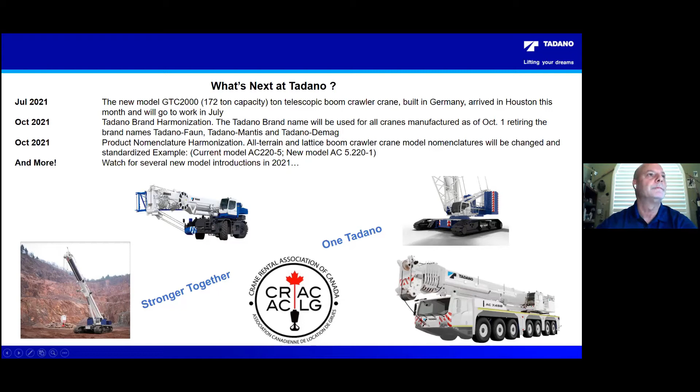Thank you, Ken, for those warm and heartfelt comments. I am a New York Ranger fan. It has been a little bit of an unfortunate year, but an Original Six fan on hockey nonetheless. I have coached hockey. I also have a son that is going to be going into travel hockey, so in for a little bit of a world of fun, and some pain as well. But today we're not going to be talking about hockey. We're going to transition over to cranes. And we're going to talk today about how we're going to take customer support to the next level on the Tadano side. So without further ado, I'm going to get started off.

Tadano maintains its laser focus on safety, quality, and efficiency to resolve issues to keep our customers running. Our mission statement is to offer our customers a great experience with ease, maximize crane uptime, and instill confidence in our brand.

On the objective side, we want to add value to our customers after the sale of our products through our service technicians and our call center. From a systems perspective, we're streamlining our processes and leveraging KPIs to further enhance our customers' experience for stock levels and fill rates.

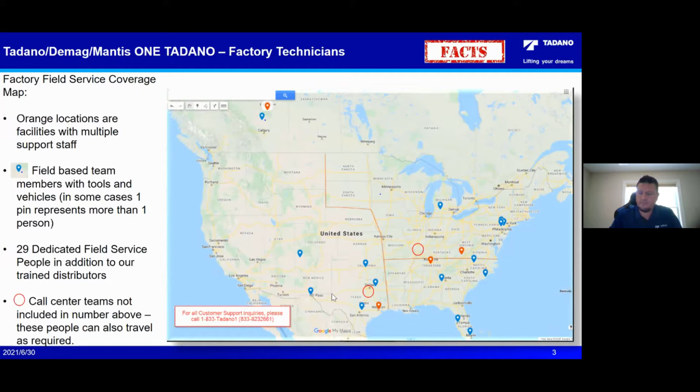Next is our Tadano facility located in Leduc, Alberta. This is a full-time service and support facility. It has a parts department to support all Tadano products and needs, and we also have distributor and customer technician training courses held there.

Now we're going to transition over to our customer call center. As of June 2020, we launched our new customer call center. It's comprised of 22 people, including our Mantis team, and we are leveraging the latest technology to accommodate the best possible customer experience, through Ring Central.

We have 10 service experts to support technical calls, 5 parts technical experts to support part identification needs, and 7 general support team members to handle general questions and inquiries.

We have launched a single North America call number for all inquiries. That is the 1-833-TADANO-1 number. If there is one thing you take from my presentation today, it is that number, which allows our end customers and distributors to have a direct line into the OEM to help troubleshoot effectively out in the field.

That call number is available 365 days, 24/7, including after-hours support. It was launched in September 2020 to provide a 100% answer rate and allow access to all areas of our customer support business the way we configured our phone system.

Next, we're going to discuss warranty and some quick facts. We believe when you have quality products, it's easy to demonstrate that with our actions. Our current target is to process every warranty claim within 24 hours of submission and turn those around.

We've launched a standard warranty statement for our Tadano and Demag products, effective March 2020. We've also increased travel reimbursement to up to 12 hours — 6 hours there, 6 hours back — for more remote areas, allowing our distributors to perform those campaigns for customers.

We have a new warranty manual combining our businesses, effective March 1st. We combined our online warranty system for all products, launched as of April 2020. And we incorporated Tadano Mantis under that umbrella for the One Tadano branding in October 2020.

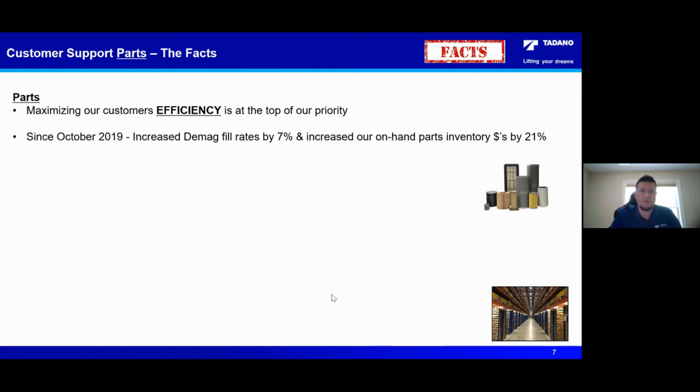Lastly, we're going to discuss parts. Maximizing our customers' efficiency is our top priority. Since October 2019, we've increased our Demag fill rates by 7% and our on-hand parts inventory dollars by 21%. As of December 2019, we increased our Tadano fill rates by 5%.

Parts cutoff times have been extended for same-day shipments to 4:30 Central. In some cases, this can mean an additional day of uptime for our customers.

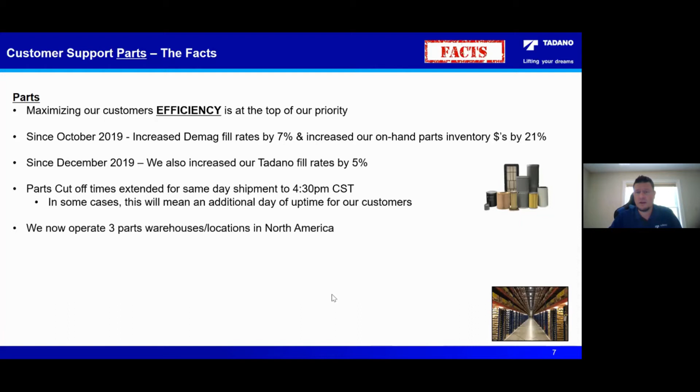We now operate 3 warehouse locations in North America. We have 2 in Houston, including our new Demag facility dedicated for parts, and 1 in Leduc. Before the end of Q1 2022, our Mantis products will follow the same process and procedures, putting parts into that warehouse.

With that said, I'd next like to introduce Justin Andrews. Justin has a love of motorsports. He resides in British Columbia. His love for motorsports is so much so that it usually involves concussions and rehabbing ailments in his body. He is an Australian living in Canada. And with that, I will give you Justin.

Thanks, Dan. That tree came out of nowhere, I didn't see it coming. I did hit it pretty hard and woke up 5 minutes later, but I was fine.

Good morning, good afternoon, and bonjour to everyone listening. I really appreciate your time, and I hope you enjoyed this presentation. My name is Justin Andrews, and yes, I am basically full Australian, but I moved over here in 2016. I've been working for Tadano now for 10 years, and in 2016 I came over to support and promote the Tadano product to the Western Canadian and Western US market.

Through this presentation, I want to touch on 4 points: the current Tadano crane lineup, what we can offer Canadian customers; the next generation, since in 2020 the rough terrain cranes went through a revamp and redesign that I want to dive into more; the challenges we face in our industry and what we're doing as a manufacturer to help ease those challenges; and the customizable options available when you purchase a Tadano product.

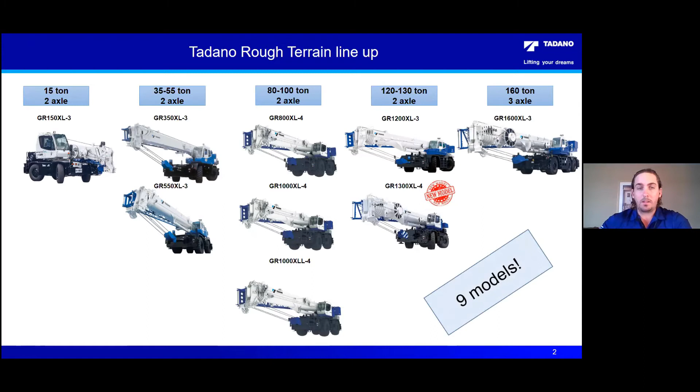So this is just touching on the lineup. Starting with the rough terrain cranes, this is our current offering. We have 9 models to choose from, everything from a 2-axle 15-ton with a 78-foot boom, all the way up to a 160-ton with a 200-foot boom, the GR1600. These products are all 100% made in Japan, and with Japanese products, a lot of the local manufacturers of the winches and other components are very close to the factories in Japan, and this is what we fit to our machines. All these products are 100% Japanese made.

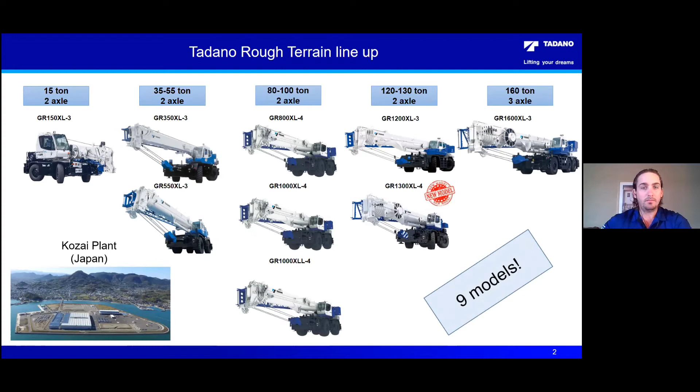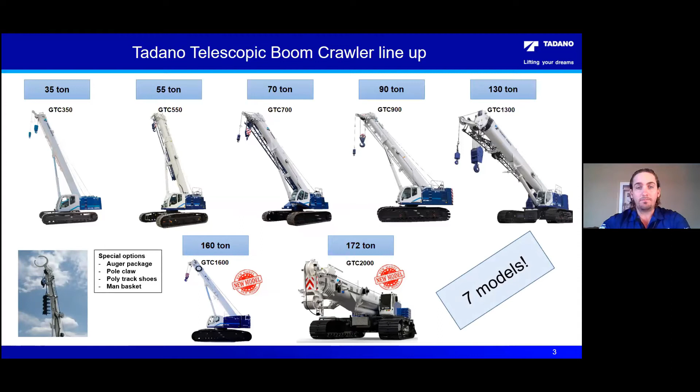The all-terrain lineup has grown quite substantially since the purchase of Demag in 2019. We're offering 21 models into the North American market at this moment. This has been very exciting. Our all-terrains are very close to my heart, I really love playing with them. So the models here, everything from the 3-axle class all the way up to the 8 to 9 axle class.

We basically should have any machine in any type of configuration, boom length, capacity that you have for a certain job. And I love to dive into these, I love really to talk about even specific cranes. As an example, the AC220 to the ATF220, 2 similar number of cranes, but 2 very differently built cranes. So, you know, I like to have these conversations with our customers.

Just to give you an insight, in the next 5 years, we're looking at bringing 15 new crane models into this all-terrain lineup, and that's really exciting for me. So please watch this space.

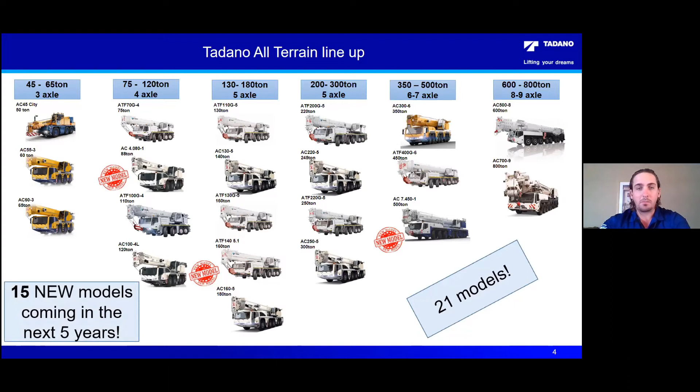Lattice boom crawler crane line. This is coming out of our Zweibrücken factory, and obviously, as we all know, this is a Demag product. 6 models to choose from, everything from a 440 ton and all the way up to our 3,520 ton, the CC8800 twin. And I'm really dying to see that crane one day, but it's a really exciting lineup.

And for me, it's a big learning curve, and I'm really excited to learn about this product. A lot of these cranes are specifically designed for certain jobs, such as the CC3800, which is our dedicated wind machine. So if you are in the wind industry, just jump online, have a look at our brochure and check out the specs of that crane. It's very impressive. Little did you know, 1965 was the first Demag lattice boom crawler crane with a 45 ton TC120. So there's a long history of manufacturing cranes.

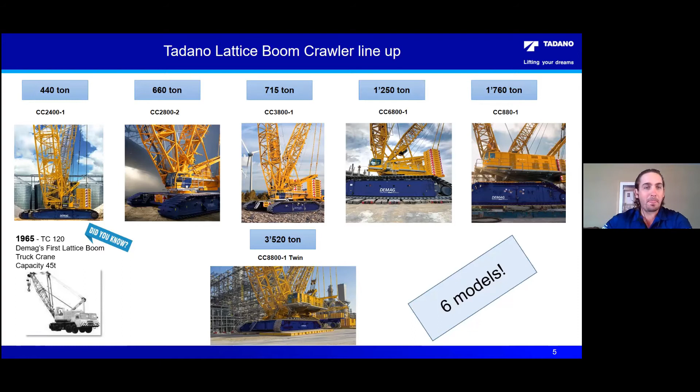Now moving into the rough terrain, I want to touch on the previous generation versus the new generation. As you can see here, a very common crane, the GR1000 XL, very popular in the Canadian market. Moving forward, and just released in 2020 at ConExpo, was the GR1000 XL and the GR1000 XLL long boom version.

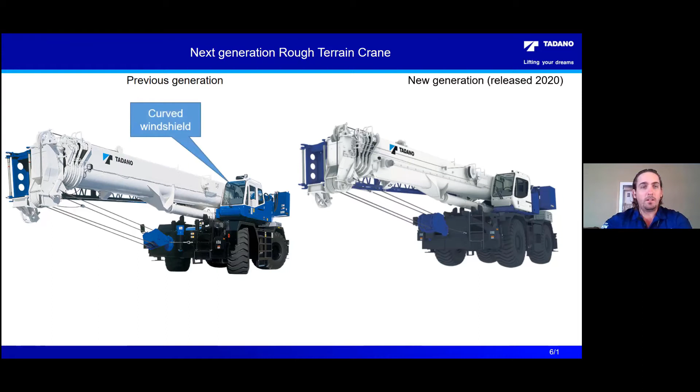I just want to touch on some really small points, which a lot of you would be very familiar with. These are the changes we've done. In the previous generation, we actually had a curved windshield on the front of the cab. We've changed it now to a flat windshield with a longer wiper blade, again for better visibility, and also probably cheaper parts if you ever had to break the windshield, and easier to replace.

Fixed counterweight position in one position, which is standard for a rough terrain crane. On the new models, we actually have a 2-position counterweight. So basically the counterweight can position 2 feet behind, which actually provides you a better chart and better lifting capacity at radius. And also there's no moving parts in this, the actual cylinders are sitting on the counterweight, so there's no swing arms or anything. You just put it in a different position and lift the cylinder back into place.

One of the comments I always received from customers was about the ladder access. It was a beautiful crane, but access was a little bit tricky. In Tadano in Japan, we did hear this. So now, and I'll explain in more detail later, we actually have a 3-position ladder system and also relocation of the ladder for better access and egress.

In the previous generation, we did not have a rear view camera or any safety cameras around the machine. Now we have rear, side, and front view cameras, plus also a backup sonar camera, and this is all standard. These are just minor changes, but there's a lot more out there.

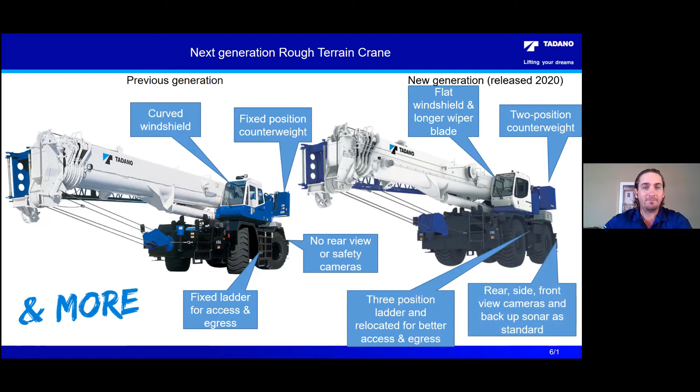For the guys that have been in the crane, they're used to the cab and used to seeing inside. This shows the changes - left side is the previous cab. We're going to a very similar size cabin, but we've changed the ergonomics where the dash is a little bit lower, so you have more visibility. The AML screen is quite a bit bigger, and it's now a touch screen, which has been tested down to -40°C and has a backup. So if there was a failure with the screen, we do have a backup to it.

The mechanics are still mechanical linkage to a pilot valve. That did not change in this new generation. Also, the 100-ton class now has a tiltable cabin up to 20 degrees.

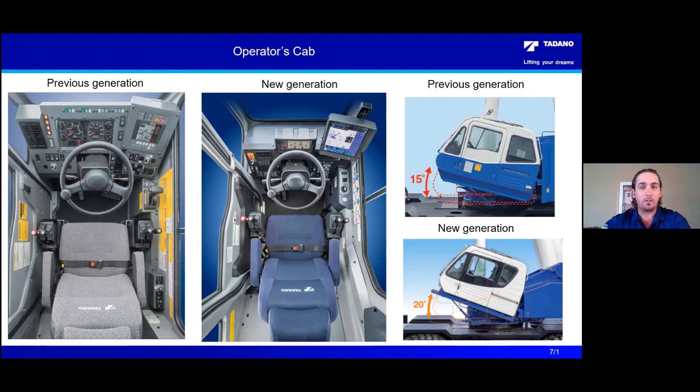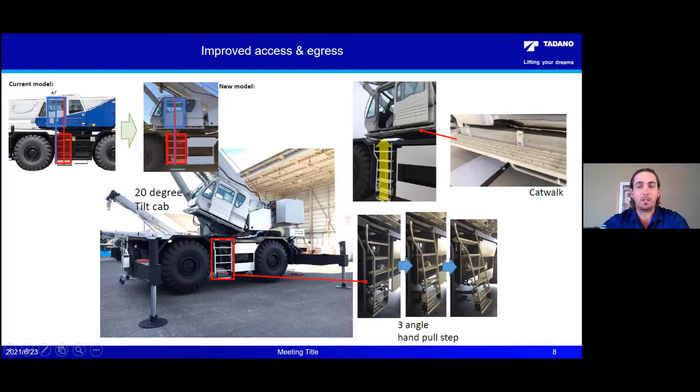As for the access and egress, this is what I was trying to explain earlier, and this is what our engineers in Japan came up with. We've actually relocated the cab slightly, and also the ladder sits directly under the cab, if you can see on the top left picture. So the access and egress is much, much nicer. Also, the ladder in the bottom right picture can come out almost like a set of stairs now, to make it easier and more comfortable for any operator.

The cameras are now all around the crane, plus also on the winches, and also the backup sonar. This is something we have standard on all next generation GR 800, 1000 XL, and 1000 XLL cranes.

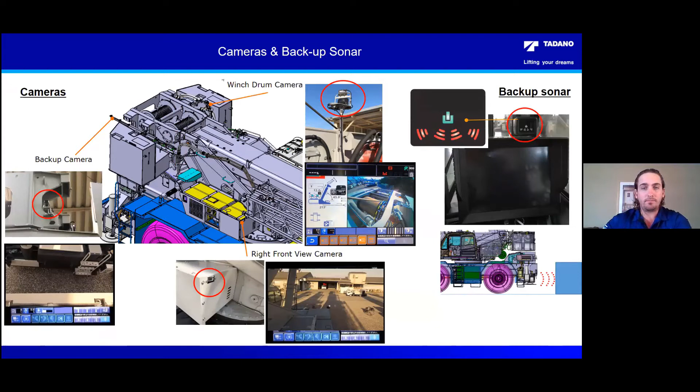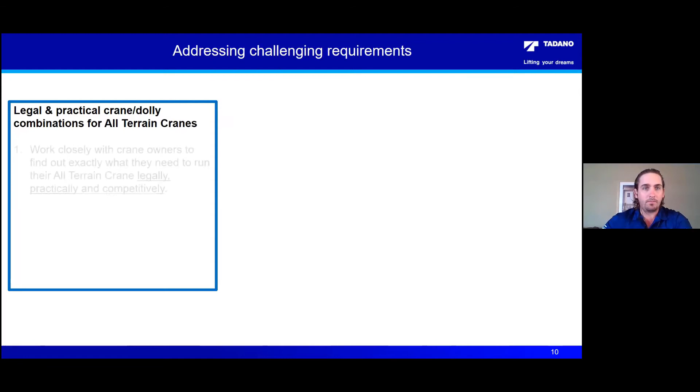Moving into the all-terrains - I really dive into this because I found it's a very big challenge in the Western Canadian market, the crane and dolly requirements are very, very strict. So what I do is work closely with the crane owners to find out exactly how they want to run. I want to run in 3 ways: legally, practically, and competitively. That's how I try and help out my customers.

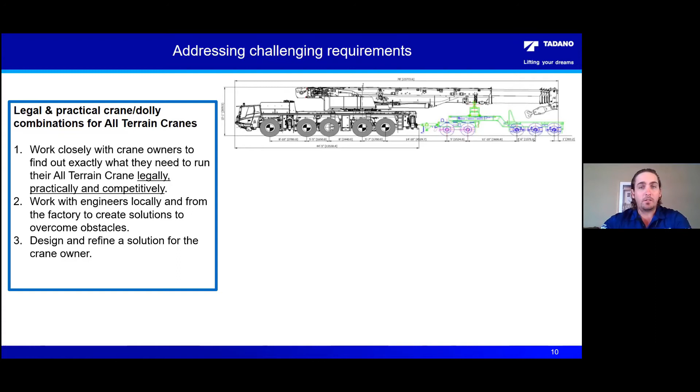So I've worked with local engineers based in our factory, and also local engineers at dolly manufacturers, to try and overcome the obstacles. That ends up coming out with the design, and then we do what we call design and refine to get the solution for the customer, which brings out the final product - which from my experience has worked out very, very well. But at the end of the day, we always want to be safe and legal. That is my goal.

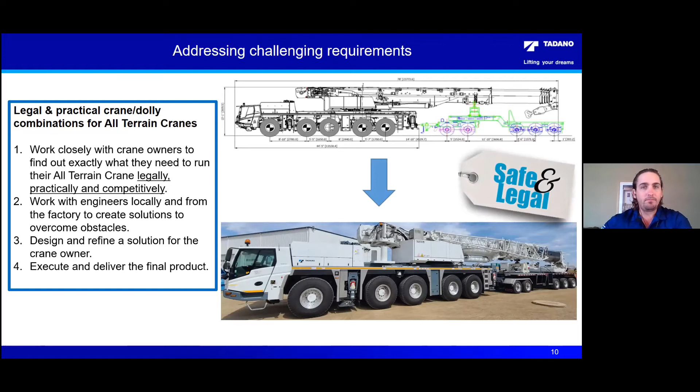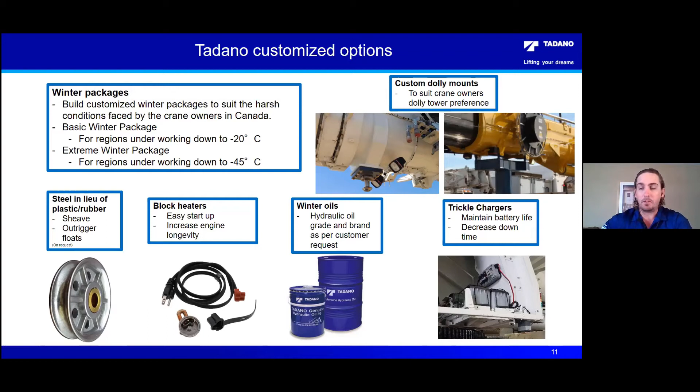Thank you, Justin. I appreciate that. Good afternoon, everybody, and thanks for taking the time to join us here today to talk through the Tadano and Demag brands and what we've got coming in the future. My name is Lance Rybum, and I am the Regional Business Manager for the Eastern Province in Canada, from Manitoba to Atlantic Canada. I'm also responsible for the Northeastern states in the US - New York State, New Jersey, all the way up and through New England.

Just a little bit about myself - I too am a hockey fan, been following the Penguins pretty much my whole life. This year didn't work out for us as well, but we've had some recent success, so no complaints here on that side. And for you Canadian fans, good luck to Montreal in the finals, hopefully they make it and they're good to go.

But moving on, I'm just going to talk about some of the all-terrain aspects and features that we've got in our cranes.

So I'll touch on the all-terrain lineup, go into a little bit more detail, and show you the differences between the ATF and the AC and how they complement each other as the acquisition was made. I'll talk a little bit about the IC1 Plus, some of the features and benefits, and also the troubleshooting aspects.

Dan touched on this in his presentation as far as our 1833 Tadano number and the accessibility for customer support in North America, and I'll just show you how to incorporate the AMLF and the IC1 Plus in aiding those guys and helping you maintain your uptime and keep your cranes running.

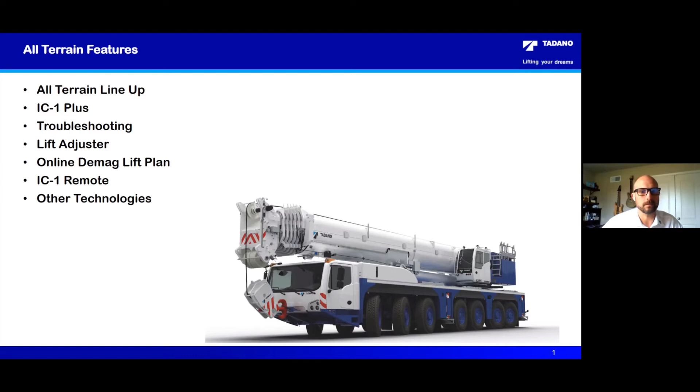So first off, I know Justin discussed the product lineups and what we offer at a high level, like a 30,000 foot level. So if I come down into like the 15,000 foot level, I'll just show you where everything lines up and where it matches up between the models.

I do get questioned a lot, and I'm sure Justin and the other RBMs and Dan and Ken can attest to this as well. We get asked, what are we keeping? What's going away? What are we going to do with our models, and how is that all going to integrate? As you can see looking at the lineup, we do have a lot of models now, but they really complement each other. That's one of the things I want you to take away from this - the integration of the Demag products with the all-terrain product family.

Because of the technologies and philosophy that Demag used versus the technologies and philosophies that Tadano Faun has used in the past, they really mesh into a solid portfolio and give you, the crane owners, the opportunity to really customize the fleet to your liking and what your needs are.

Going down through the lineups, you'll see with the Demags particularly, they focus more on long boom single engine concepts. So you're gaining that weight benefit and taking advantage of that by adding an extra boom section, allowing you to get more main boom length and save on the weight so you can get the permits for those size class machines.

Conversely, the Tadano machines have traditionally stayed with 2-engine machines and shorter boom, more known for their heavy pick main boom capacities versus their jib capacities. Like I said, you can see it really lines up well. We do have one or two spots where we have multiple machines in the same class with very similar specifications, but for the most part, the two lineups really complement each other, give us a full offering, and allow you, the crane operator, to really customize and pick and choose what fits your needs best.

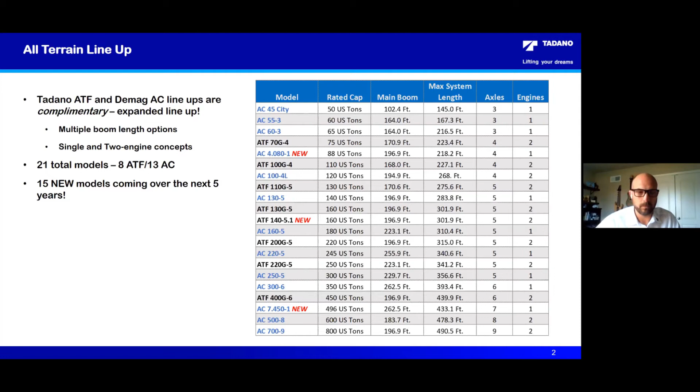Moving on, talk a little bit about the IC1 Plus. The IC1 Plus control system is the system that we will be continuing with into the future. With the new models that we've had recently introduced on the ATF side, those models are going to continue through their natural lifespan, and as they get replaced, that's when you'll start to see the IC1 Plus get incorporated into the newer models.

So IC1 Plus, some of the features include live determination of the crane's capabilities, depending on the slew angle of the superstructure, counterweight, and outrigger position. It really allows you to take advantage of what the crane does and what it offers. It includes automatic counterweight detection, so as soon as you pick up the stack, it's going to know what's on the back of the crane. It allows you to just confirm that in the IC1, and then you're good to go.

But it does and should know what you're picking up. The asymmetrical outrigger settings with the IC1 Plus aspect allow you multiple length setups, so it'll incorporate that into maximizing your capacities.

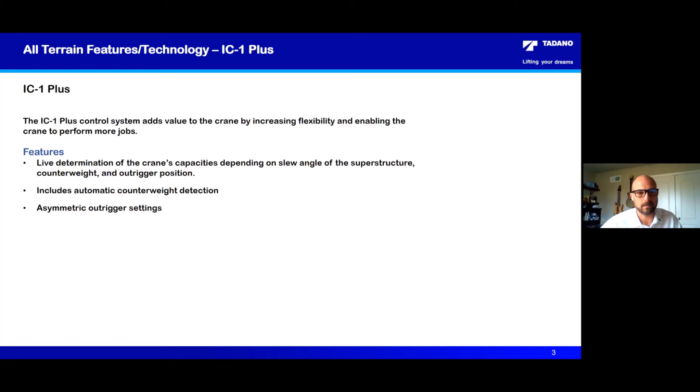Some of the benefits of this: it improves the versatility of your fleet. Paired with the onboard determination of the capacities, it allows you to really work in confined spaces and maximize what your capacities are, as we talked.

It reduces transport costs. So if you've got a situation where you may not be able to fully utilize the outriggers at 100%, but you can in one spot, you'll be able to maximize what your capacities are over that outrigger beam, and possibly beat and outlift what the 360 capacities would be in that particular situation.

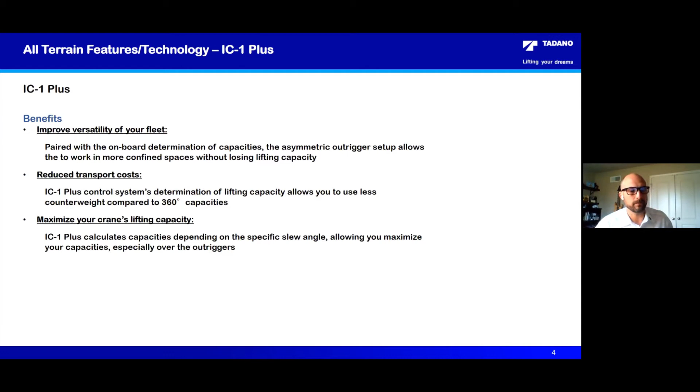And you can also just maximize the crane's lifting capacity in general. It allows you, through the slew angle, to interpolate and tell you what your max capacities will be. So it really allows you to add versatility to your fleet and gives you a lot of flexibility.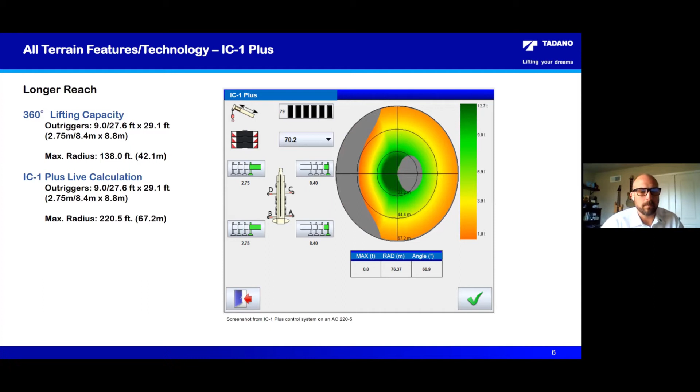Touching on the online job and lift planner, this is a graphical job planning tool. It simulates the IC1 Plus that you see in the cab. It allows you to plan for asymmetric or just straight 360 charts, depending on your setup and how you need to simulate it. It also shows in the lower right-hand corner the outrigger ground pressure.

So if you need to have critical lifts or different areas where the outrigger ground pressures are important, you'll be able to go in and simulate that before going out to the job, so you know what limitations you have. The website's listed below. You can also reach it at demagmobilecranes.com — there's a link on that page as well.

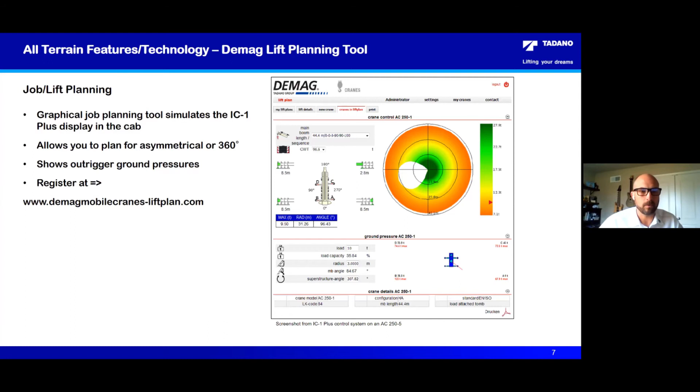Another benefit or feature of the IC1 Plus is capacity radar. This is basically a plus or minus 30-degree working area that you can see, and the little black dot represents where your load is located within the chart. Obviously, your green, yellow, and red simulate your limitations within your RCL or your IC1.

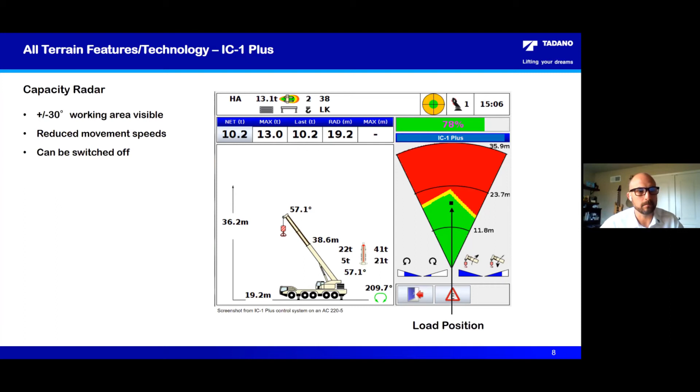Moving on to troubleshooting. One of the benefits — and this is available, I don't have a screenshot of the IC1 Plus, so I apologize for that, but it's very similar to what you see on the AMLF. This is a screenshot out of the newer AMLF control system in the Tadano Faun ATFs. As you can see, it's very simple to access what the error codes are within your crane.

All you do is click this little red button up here, and it'll pop up this little screen on the right-hand side. Everything is pretty plain — it tells you what the error code is and describes what the code should be. Paired with calling into the 1-833-TADANO-1 number, you can talk through with the Tadano tech, and they can actually help you troubleshoot and get the crane up and running.

We're looking at 85% of the time where we're able to at least get your crane running. It may not be completely fixed and repaired, but you can get the jobs done, and you can get it back to your shop to finish and do the full repair if required. But great feature.

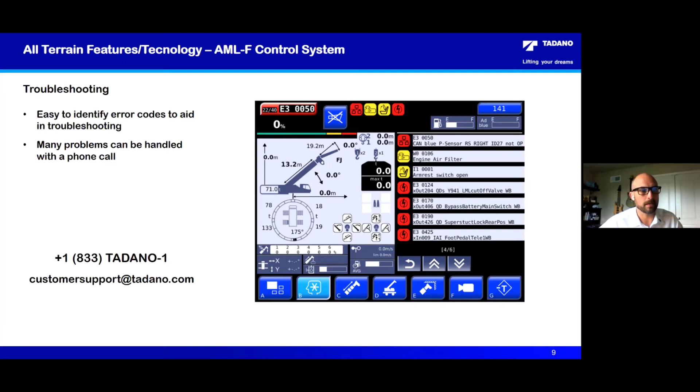It allows your operators to really know what's going on with the crane and hopefully help you troubleshoot and maximize your uptime. Another cool feature on the ATFs is called Lift Adjuster.

What this does is it allows you to account for any boom deflection that you would have as you're picking a load. Most operators are very familiar with this and are able to do it, but this takes the guesswork out and really allows the operator to sit back and have some level of comfort that he's not going to have to worry about his load swinging or anything getting damaged.

So if you have an MRI or something really heavy that's inside and it's a blind lift, simply click the button in the lower right-hand corner, it revs up the RPMs on the engine, you pull back on the hoist control lever, and it goes through a set of lifting, running the hoist up and booming up to account for any boom deflection you may have. As soon as the LMI realizes that there's no more capacity or weight being added to the load, it automatically shuts off and the operator's back in full control of the crane.

So again, just a safety feature. It might work a little bit slower than some operators say - that's one of the complaints I've heard, that it's slow, but it's intended to be slow. Speed is the enemy in a lot of these critical lifts, so you want to take your time and make sure the crane's working properly. This is what it allows it to do automatically.

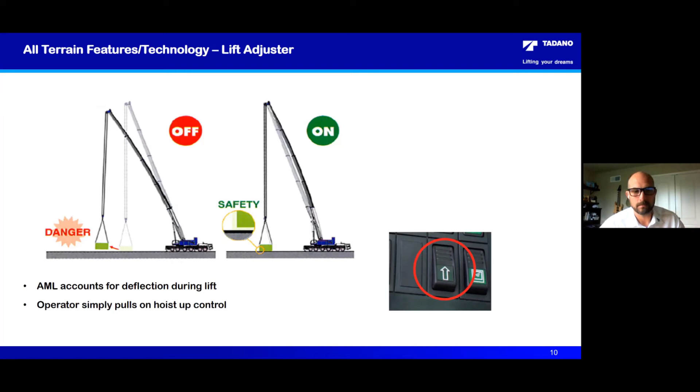It also works in reverse - we call that the lift release, but basically it's exactly the opposite. Click the button, it starts to lower the load, and as it releases the load onto the ground, it accounts for any boom deflection that may be had. Essentially what it's doing is reading the radius, what the radius is in the LMI.

Lastly here, before I get into some of the other technologies, the telematics. Everybody's familiar with telematics, it's been around for a while. Our version of it - we've got the HELLO-NET on the ATF side, and just the Tadano on the GRs and the GTCs and other models as well. And then the IC1 Plus, or the IC1 remote, was what was used on the Demag side. So all the AC cranes and the CC cranes that are coming out have this capability.

Essentially it's a cloud-based system connected through a mobile network, so it allows for two-way communication. Software updates in the future will be able to be done remotely - you won't have to worry about having somebody come out, shut down the crane, and plug in a laptop. We'll be able to do it over the air. Essentially it's an extension of the IC1 Plus.

So you can sit at your computer and pull up where your crane's at. You can pull up real time, or virtually real time - obviously there are some latency issues with the wireless network, so it might not be specifically exactly the same as what you're seeing on the crane at that minute, but it's very, very close. You can see what the loads are, you can see where it's located via geolocation. Any information you can see within the IC1 Plus sitting in the seat of the crane, you can access through this database.

You can access over 200 data points - engine data, crane data, like I said, pretty much everything you can see in the IC1 Plus, you can see through the computer. It also allows you the ability to set up email alerts, so if you have an overload or something happens to the crane, or it moves outside the geofence you set up, it'll automatically alert you via email.

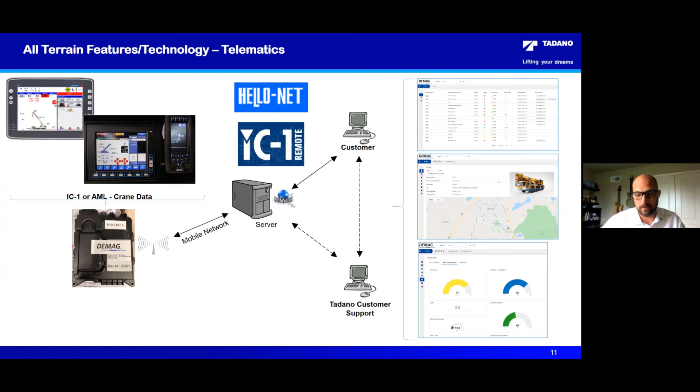And lastly, a couple more features and technology that we've got either coming or already implemented. E-Pack is on two machines right now, the AC45 City, our three-axle city crane, and the AC 4.080, which is coming later this year. Essentially, this allows you to bypass using your diesel engine. So if you've got an indoor job or any other sensitive jobs where you can't run a diesel, this allows you to completely run the crane via an electric interface. You do have reduced speeds, but it does allow you to run the crane complete.

Next we have the axle load displays. It's a really cool feature if you're dealing with permitting processes and making sure your axle weights are accurate. What this does is give real-time axle weights. So as you're on a job site or in the shop before you leave to go out onto the road, you can check your axle weights and in real time set up and balance your weights to make it match what you need.

FlexBase is in the lower left-hand corner, basically infinitely variable positioning on the outriggers. Essentially, what we have in most of the larger cranes today is defined positions for the outriggers, say a 50, 75, and 100%, and those beams need to be in that position to have the chart. If you're not quite at that position, you get the reduced chart. FlexBase allows the computer in the IC1 Plus to interpolate any position along the beam, giving you a real chart and maximizing the value of the crane and its capacities.

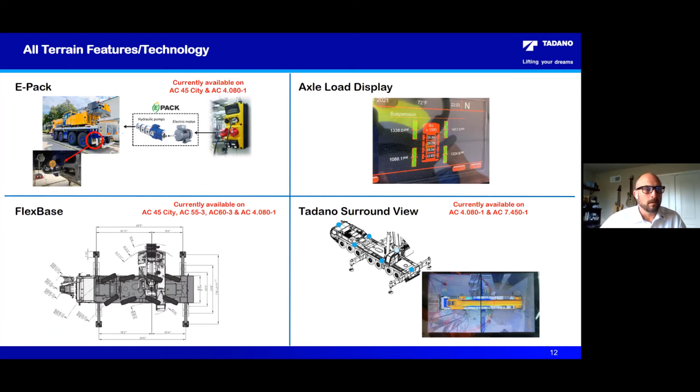Thank you very much, Lance. I will invite Ken, Justin, and Dan to join us back so we can have a chat and answer some questions from your customers watching today. Let me see if Ken is back with us. There, I'm back, but I'm not able to connect my video, it says the host has stopped it. Okay, let me invite you back. Here we go. Wonderful, there we go, thank you Claire. Welcome back, I thought it might have been something I said. Not at all, not at all.

As I was listening to all of you speak, I thought about what a phenomenal change management process Tadano has been going through, the challenge of rebranding some very popular machines where you now have to change the lingo. How long do you think this process will take, Ken? Unifying the brand with three other popular brands under Tadano is going to take a while, not only for your team but for your customers to get used to it. I also want to know about all the tools you're using. We talked about the Demag mobile crane lift plan, will all those different tools over time also change names?